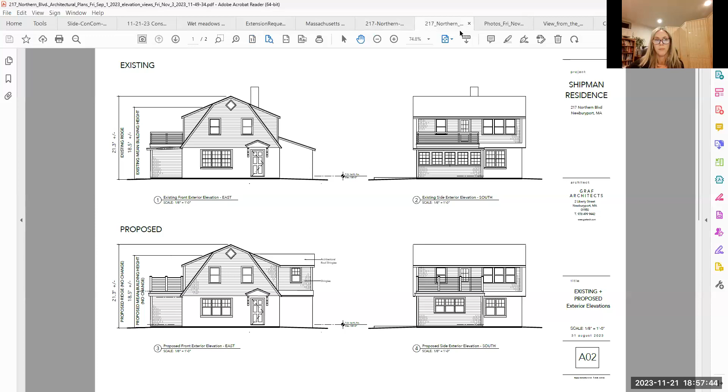Julia, I think it's simplest if rather than starting with the site plan, we go to the architectural profiles. If you look at the top, that's existing, and at the bottom, that's proposed. On the second sheet, looking at the right-hand drawing, you see there's a single story level. Then at the bottom, the chimney goes away and this off-centered addition goes on top. So the project is general renovations, but the big add-on is that second floor area. There's no impact on the ground other than temporary construction.

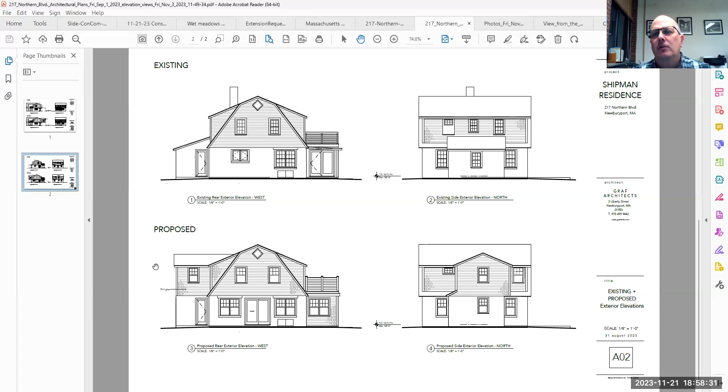Now if we can go to the site photos and then the site plan. If you look at the site, it's a fairly well-worn site. That addition is the area off to the left. That area will then become a two-story, shifted slightly towards this at-grade patio area. If we can go to the next, and just flip through them.

If you see the tree there, we don't anticipate the tree being in the way. Eileen Graf is pretty certain this can go forward and that tree can remain as is. Let's go to the next. You can see the dune is already heavily altered on this site. The final one will be a broad view of it.

Or actually the one above that. Yeah, so that's a view. You can see the area where the work would happen is on the right. The dune is either lawn, pavement, or otherwise altered on this site. There's really no areas of fully functioning dune. There's certainly plenty of dune that functions, but not what you typically think of when you think of sand dune. If we can go to the site plan.

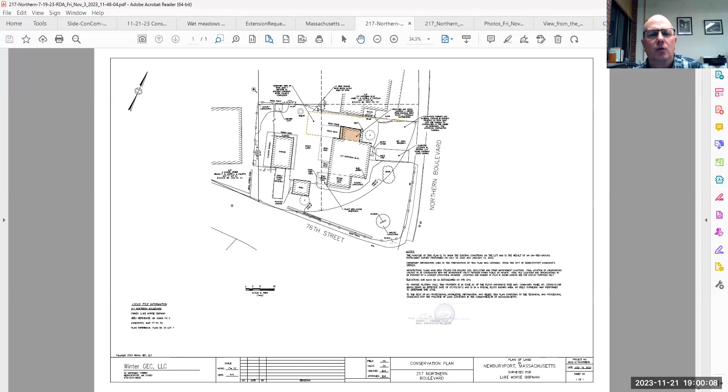You can see we have a fairly tight limit of work, that gold dashed line here. We have notes about contractor parking, material storage in the existing driveway, and a dumpster location outlined. So this is a pretty minimal project. In the bottom left-hand corner of the structure, there's a small wood landing to be removed and a granite step to be removed, and that area gets planted with native vegetation.

Even though the addition itself is going over an area of wood deck, so it's not really impacting any vegetation. We just provide that as mitigation for the temporary impacts. And there's a note that any portion of the vegetated area that's in the work limit is restored to existing condition after project completion.

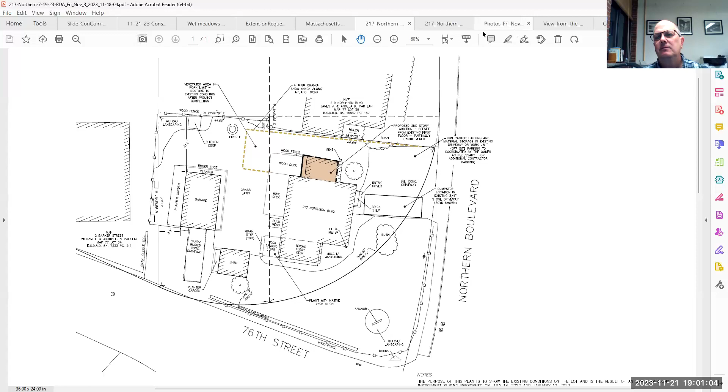So is that existing condition beach grass or lawn grass or what is it? Probably best to go to the view from the west. To the right of that, in the photos. No, the tab to the right. I think that's probably—oh no, go the other way. Yeah, sorry, right there.

Yeah, so it's kind of—I wouldn't describe it as dune grass, but it's just sort of loose vegetation. It's nothing crazy. I don't think it's full on lawn. We can flip through those photos and see if I've got one that shows that.

Let's see. It's pretty much lawn around here. Pretty good lawn there, I would say. Why don't you answer the vegetation question first? Let's see if there's a better photo. I think it's sort of like worn lawn. I don't think there was any area of dune grass, if I recall. Yeah, you can see that's lawn in that area.

Any chance we could get beach grass there? You can't replace the lawn with new lawn. No, obviously. What we'd be looking at is what's happened in the past—if you drive equipment over lawn and don't add any material, you just rake it and throw down seed to repair scars. We're not looking at anything more than that.

I think what would be more effective on this site would be to offer a couple native shrubs placed somewhere on site. We're doing some dune grass planting in the area where the at-grade pad and granite step are coming out. But maybe we could have two shrubs at a location to be named later, in coordination with Julia—a couple bayberry or maybe some beach plum—then I could coordinate with the applicant on where those could go. Because otherwise it'll just be a funny little stranded area of dune grass surrounded by lawn.

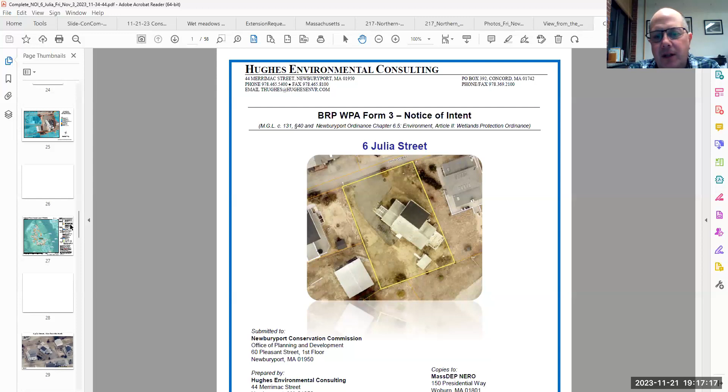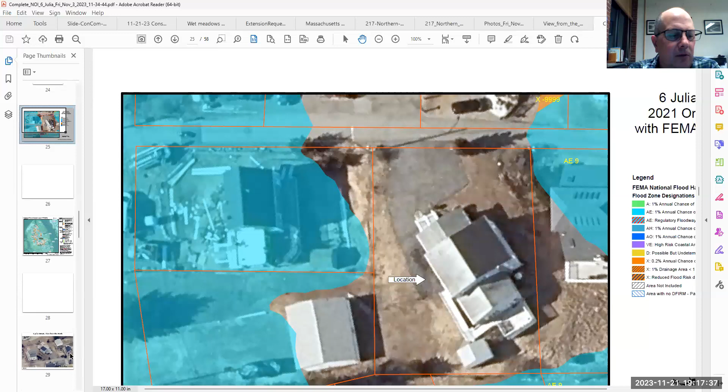If we look at the flood map, you'll see that this is all in the X zone where the building is. Then if you see where the garage is, which is just partially at the edge of the flood zone, that is the other lot, extending out with a driveway, etc. If we go to the aerial image, here you get the full view of the structure. The garage is in the upper right, and the structure is right there with the shed in back. So you have pavement, a garage, and driveway, that is in the X zone.

I just have some general photos here. Similar to the last one, there's remnant lawn, although the dune is winning the battle here. It's very challenging to keep a lawn up in a dune system - they want more water than nature gives them. So anyway, we can probably skip by all these. I think you have a sense of what the site is like. We can go right to the site plan.

Okay, so on this one, because we needed to do foundation work if we were going to keep the addition that was there, we are actually demolishing it and rebuilding on helical piles, and then building that expanded deck area, again supported on helical piles. We have areas where we're removing some hardscape, including some pavement. We're planting, and we're removing concrete up on that other lot.

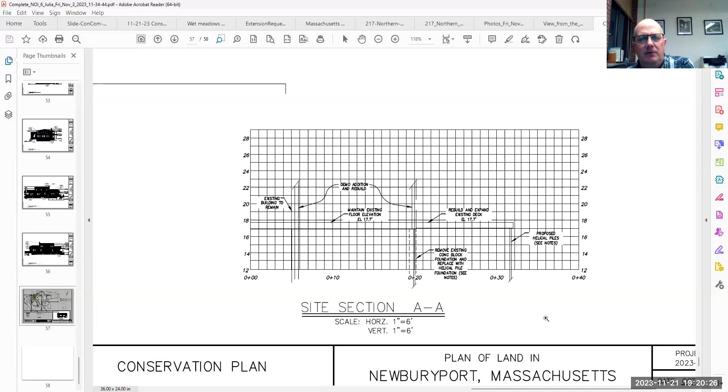And helical piles. So we've got our elevation, we've got the demo and rebuild. Everything's supported on piles. We're outside the floodplain with the entire structure. So we can go through the architecturals to kind of get a better sense of what it looks like. But it's a relatively straightforward project, and it does comply.

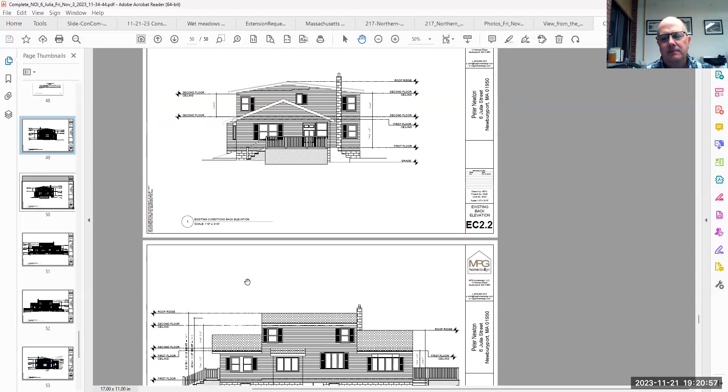So you can see there's your existing. And if you see the roof line and everything on that addition area with the deck at the bottom, and then we can go down. Okay, so there's the deck area on the bottom with existing. And that's all so far all existing.

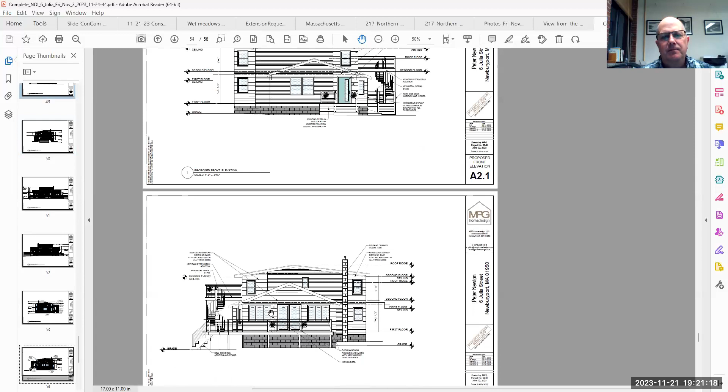Okay, so now we start getting into proposed. And you can kind of see it's a double level deck now, and it's open on the underneath. You'll notice on the existing, there's lattice. On the proposed, there's not.

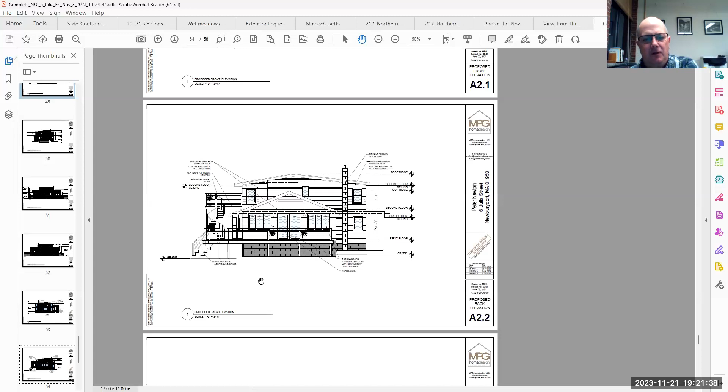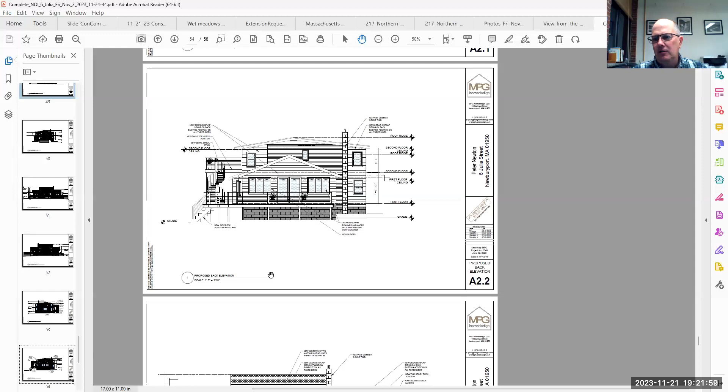Everything's elevated. The existing home is still solid foundation. There still will be some pavement on the lot, there'll still be some of that lawn struggling to survive, but there will be some areas that get removed and mitigated. And we have a net increase of 108 square feet, I think it is, of vegetation on site. But I think even more importantly, we're getting rid of some areas of concrete and pavement. So it's not just an improvement in dune function from the vegetation change, but it's also from removal of hard structures and getting rid of the lattice under the existing deck.

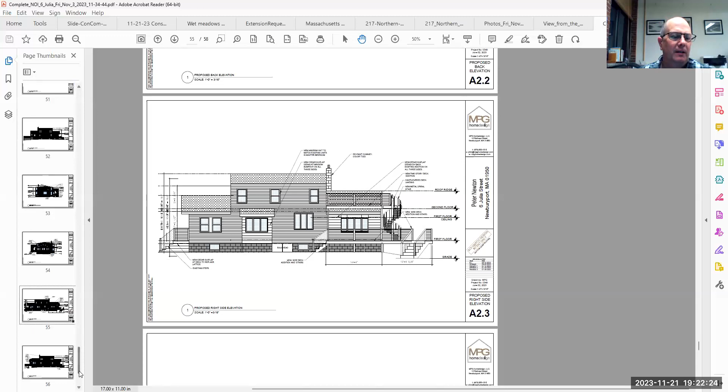The green sort of long oval shape you pointed out before, what did you say is there now? Oh, on the site plan, if we can go back to that, there's an area of pavement. So you see that, this is the driveway. Part of what's coming out is the lawn next to the pavement. And we just kind of gave it the oval shape because it would have looked really funny if we just kind of saw cut the pavement. That's the lawn that's already there.

If you see like the area that's to the left of that line that cuts through it, below, it's almost like - can you follow the edge of the driveway? Yep, right here. Yeah, so that's the edge of the driveway. Everything to the left of that line and then below that line is pavement. Oh, I see - that's the small driveway. The area to the right inside that sort of peanut shape is...

That is all lawn. We're just taking out lawn and putting in dune grass, but the idea is to at least have it look like somebody was landscaping it as opposed to just saw cutting out the pavement for the numbers and leaving the lawn. So, to the right of the peanut shape, that's lawn - kind of struggling lawn. I think there were some decent photos that showed that area.

I think that might be the top one, maybe. Yeah, here's the pavement, right. Right, so there's the pavement. You can see there's lawn, but it's struggling. Sad looking lawn. And you know, lawns like this, they will green up a bit in the summer, but they sure die off fast at the end of the season.

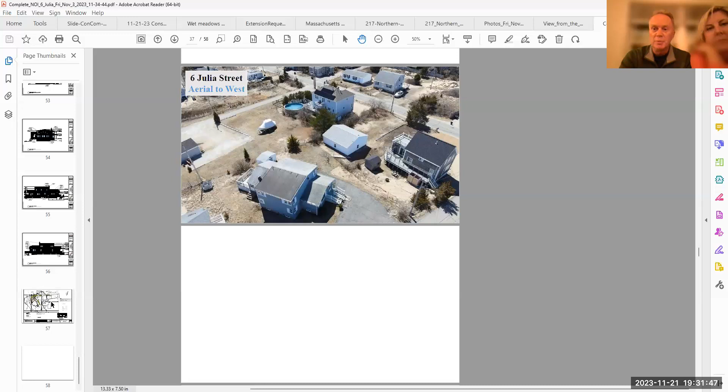What's going to go where the shed is now? That will be partly the extended deck, and then part of it will just be new open space that we'll plant in. I believe that's part of Tom's plan.

Here's the outline of the shed. I was focused more on the fact that we're removing concrete and pavement, but we're also removing the shed, as Peter noted. We're taking out a lot of things, and there's a little concrete block wall coming out too. We're taking out a bunch of little things that grew in as the artistry of former owners and their landscape prowess, which we all know inhibit dune function. We're really improving dune function with the project just by removing those and planting them.

But Peter, are you okay with throwing some beach grass in that triangular area? Yes, absolutely. We see doing more of that. One of you might have mentioned this, or maybe Tom did earlier, but yes, absolutely, we see adding more dune grass over time. Yeah, we love that.

Actually, if you wanted to put some native shrubbery in there in place of dune grass, that would be fine too. I can work with these guys to give them a list of good plants to consider, and once they get the project underway, they can spend some time looking at how they can improve the landscape, and I can give them some ideas on how to improve dune function.

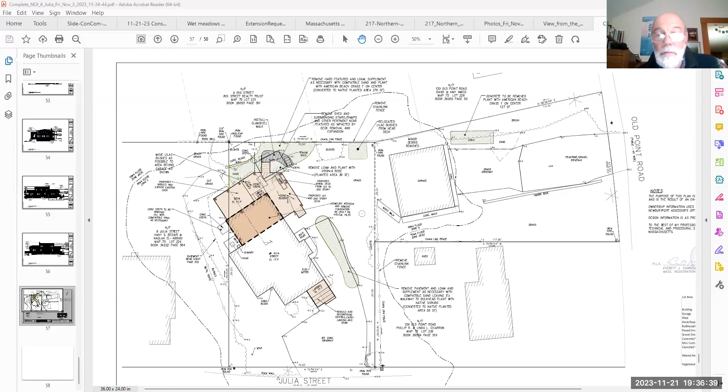All right, do we have anything else? Just wanted to mention one thing we talked about at our last meeting, regarding the... or do we want to close the public hearings first? Yeah, that's what I was thinking too. All right.